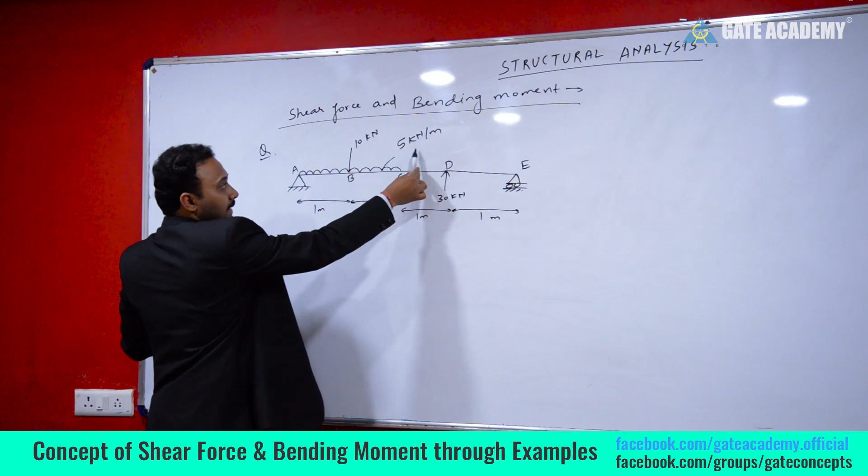तो सबसे पहले ये आप देख सकते हो यहाँ पर A से C तक एक UDL है 5 किलोन्यूटन पर मीटर का। एक पॉइंट लोड लग रहा है 10 किलोन्यूटन का B पॉइंट पे। D पॉइंट पे एक अपवर्ड लोड लग रहा है 30 किलोन्यूटन का, और सपोर्ट कंडीशंस एक हिंज्ड और एक रोलर सपोर्ट है।

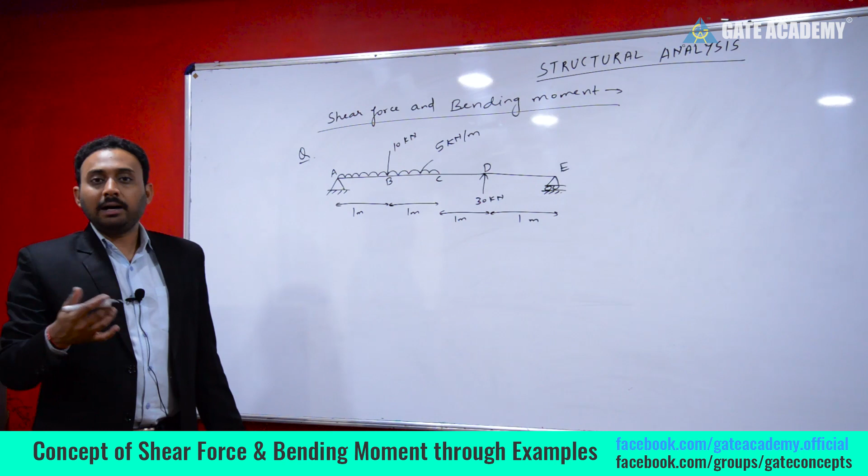तो अब इस क्वेश्चन को सॉल्व करने की कोशिश करते हैं। अब हम लोग थोड़ा जल्दी सॉल्व करेंगे। जो जैसे हम लोग सेक्शंस काटते थे वैसा हम नहीं करेंगे, हम लोग थोड़ा अपनी स्पीड बढ़ाने की कोशिश करते हैं।

तो अभी देखिए इसमें यहाँ पे दो सपोर्ट्स हैं। तो पहले मैं सपोर्ट रिएक्शंस निकालूंगा यूजिंग इक्विलिब्रियम इक्वेशंस। समेशन Fx इज इक्वल टू 0, समेशन Fy इज इक्वल टू 0 और समेशन M इज इक्वल टू 0। ये तीन इक्विलिब्रियम इक्वेशंस होती हैं जो हम सपोर्ट रिएक्शंस निकालने के लिए यूज़ करते हैं जनरली। तो अब आप देख रहे हो ये डिटर्मिनेट स्ट्रक्चर है।

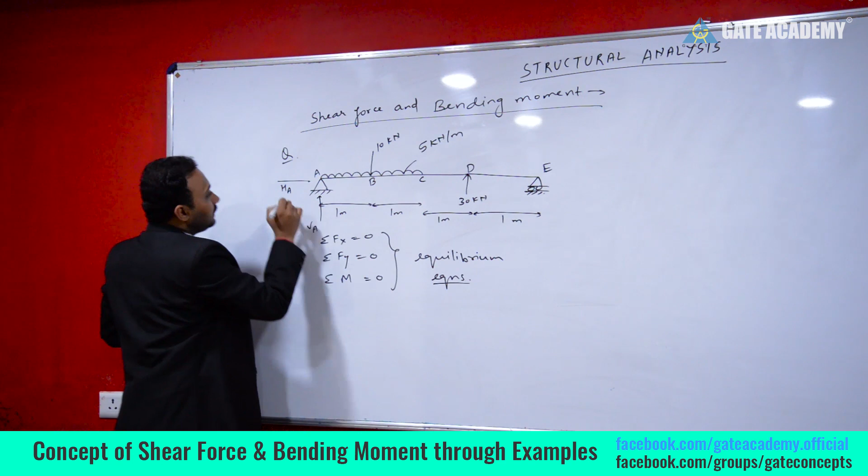यहाँ पे तीन ही अननोन रिएक्शंस होंगी, एक यहाँ पे दो, एक वर्टिकल VA मैं लिख देता हूँ, यहाँ पे HA लिख देता हूँ और यहाँ पे VE या RE कुछ भी आप मेंशन कर सकते हो। तो HA मुझे दिख रहा है मेरा 0 है बिकॉज कोई हॉरिजॉन्टल फोर्स नहीं है।

समेशन Fx इज इक्वल टू 0 टोटल स्ट्रक्चर पे हमें अप्लाई करना है। इसका यूज़ करेंगे तो यहाँ से मुझे HA 0 मिल जाएगा क्योंकि कोई फोर्स हॉरिजॉन्टल डायरेक्शन में एक्ट नहीं कर रहा है।

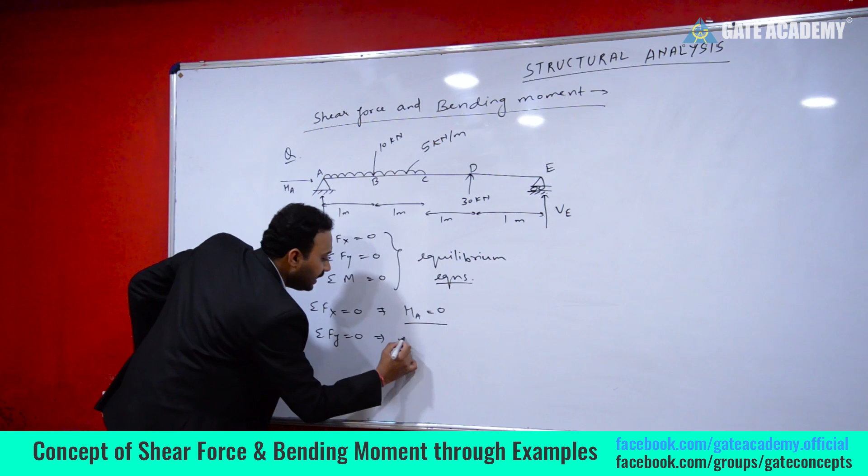इसके बाद अगर मैं समेशन Fy इज इक्वल टू 0 का यूज़ करूँ तो मुझे VA plus VE, वर्टिकल डायरेक्शन के सारे फोर्सेस को ऐड कर रहा हूँ, plus 30, this is also acting in vertical direction, and this is equal to 10 plus this load is 5 kilonewton per meter into 2.

So we will get one equation, VA plus VE is equal to 20 minus 30, that will give me VA plus VE is equal to minus 10. This is one equation that we have got.

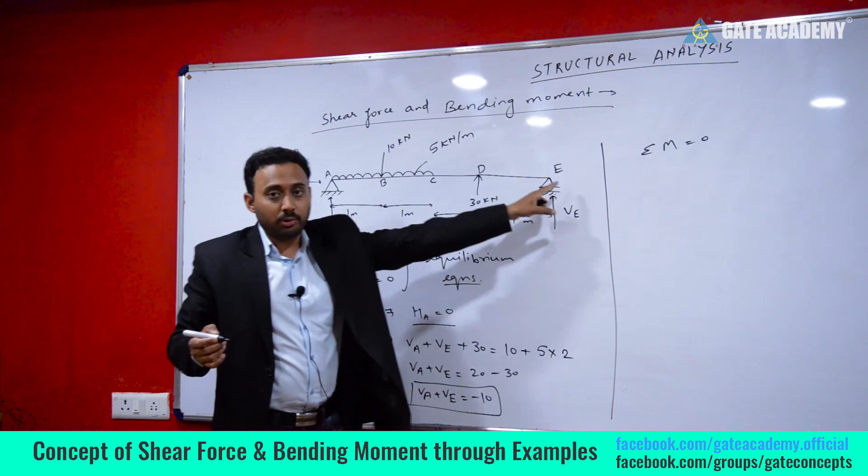Now using summation M is equal to 0. Let us take moment about A because A is also hinged and E is a roller. So we will have to take moment about any hinged point. So we will take moment about A. If we use summation MA is equal to 0, we can use any sign convention for this because this is a normal equation that we have to solve.

So let us take 10 into 1, that is in clockwise direction, then minus, then plus, we'll take this for UDL: 5 into 2 into 1 - 5 is the UDL value, 2 is the length over which it is acting, and 1 is the distance to the center of gravity. So 5 into 2, total load into 1, that is from the center of gravity. Then minus - this is in anti-clockwise direction - 30 into 3, and this is also minus VE into 4. This is equal to 0.

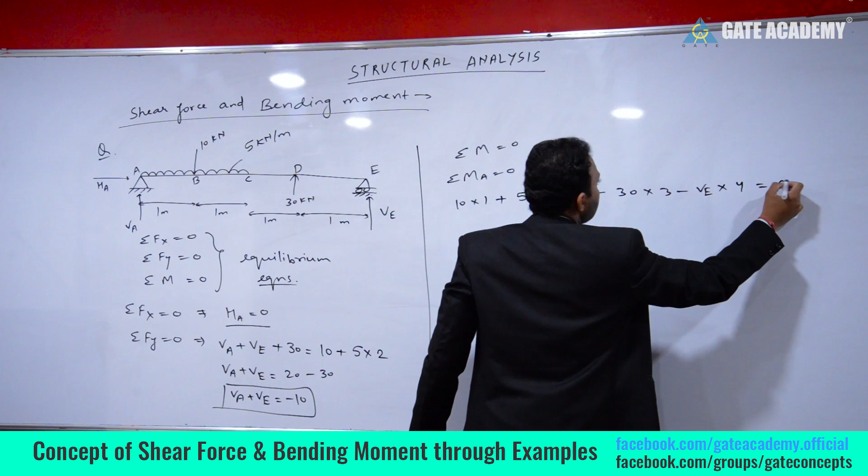So we have considered all the loads. Moment due to HA and VA will be 0. So solving this equation, we will get minus 70.

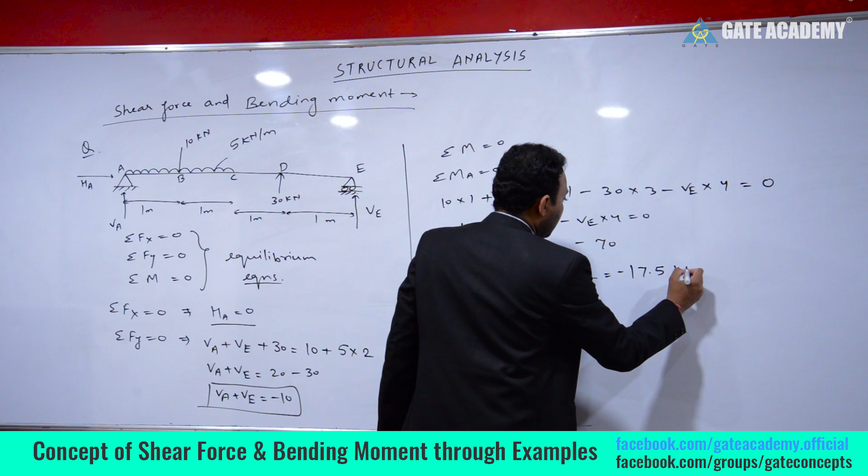VE into 4 is equal to minus 70. So VE will be minus 70 by 4, that is minus 17.5 kilonewton. So we will get minus 17.5 kilonewton as VE.

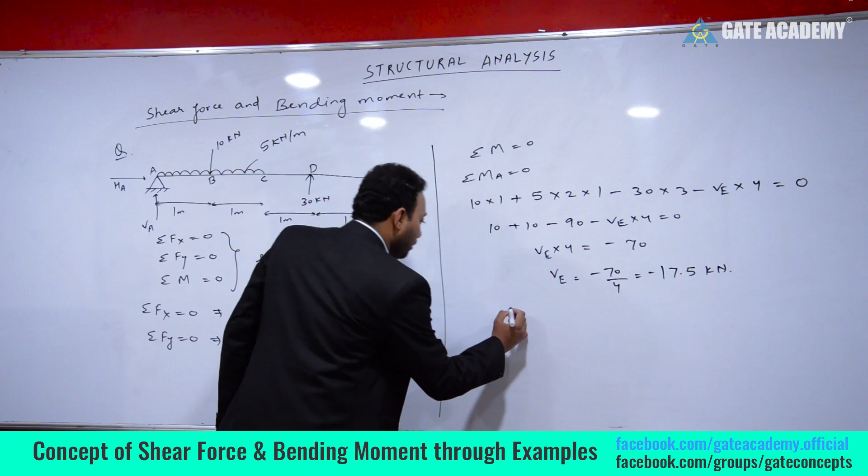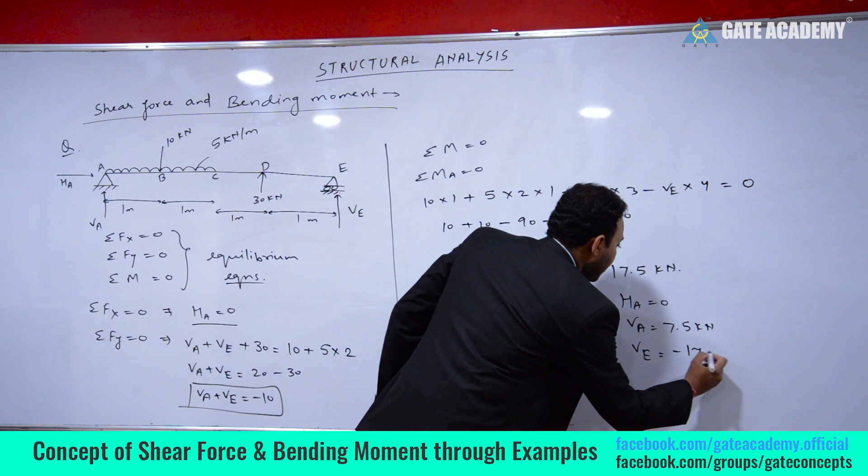So using VE in this equation, VA plus VE is equal to minus 10. So we will get VA minus 17.5 is equal to minus 10, and VA we will get 7.5 kilonewton. So we have got all the three values: HA is 0, VA is 7.5 kilonewton, and VE is minus 17.5 kilonewton. So we have got all the reactions.

Now let us solve for shear force.

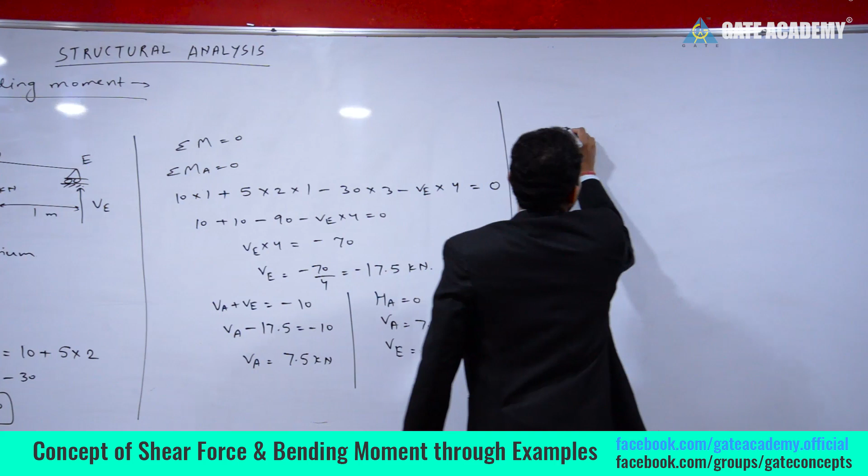Now I am drawing just the reactions. 7.5 kilonewton at point A, then the loading: 10 kilonewton is this much, 5 kilonewton per meter is this much. This is point A, B, C. At D, 30 kilonewton force is acting, and at E point, this is 1 meter, 1 meter, 1 meter and 1 meter, and at E point minus 17.5, so it is in downward direction.

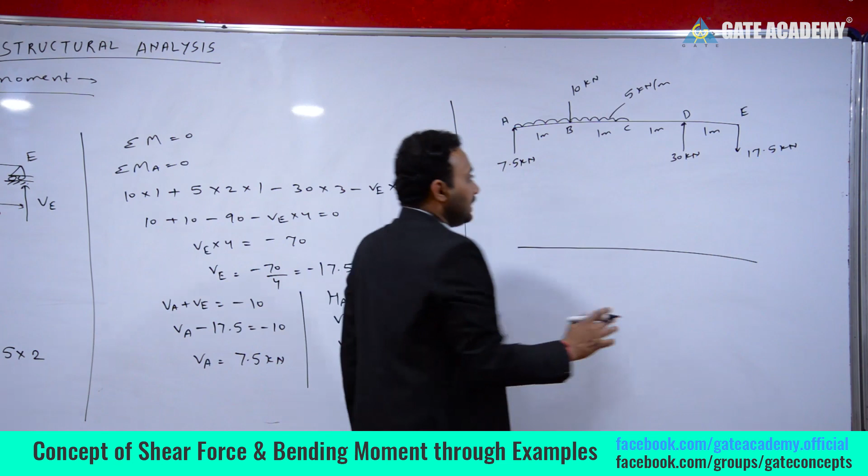17.5 kilonewton, so we have drawn all the forces including the support reactions. Let us draw shear force directly. We don't have to cut sections because this is easy, and we've already studied the process of drawing SFD. Let us start with 7.5 first, drawing a line of 7.5. It is a sudden jump because due to point load, shear force shows a sudden jump, so 7.5 kilonewton is here.

Then UDL. In case of UDL, you should remember that shear force will get a decreasing line. Like we have to calculate at B, so let us calculate at B. Shear force is 7.5 minus 5 into 1, so we are getting 2.5 kilonewton at B.

This is on the left of B. On the right of B, a sudden change of 10 kilonewton you will see. So let us draw at B: it is 2.5, so we will join this. Now a sudden jump of 10. 10 kilonewton is acting, so this will be 7.5, so this total will be 10, this total will be 10.

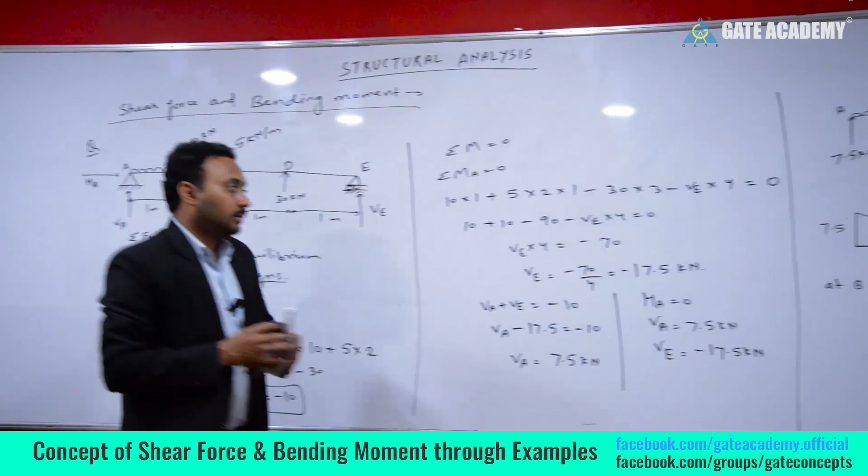Now let me write this a little bit below. So this whole is 10. Now again with the same slope it will go down, so let me calculate shear force. I am calculating it here. At B we have calculated shear force as 7.5 minus 5 into 1, this we are getting 2.5 kilonewton.

Then at C we will calculate shear force at C. So this will get 7.5 minus 5 into 2, that is the total UDL, minus 10, so we are getting minus 12.5 kilonewton. So it will go further down. At C we will get this length as 12.5 in negative direction.

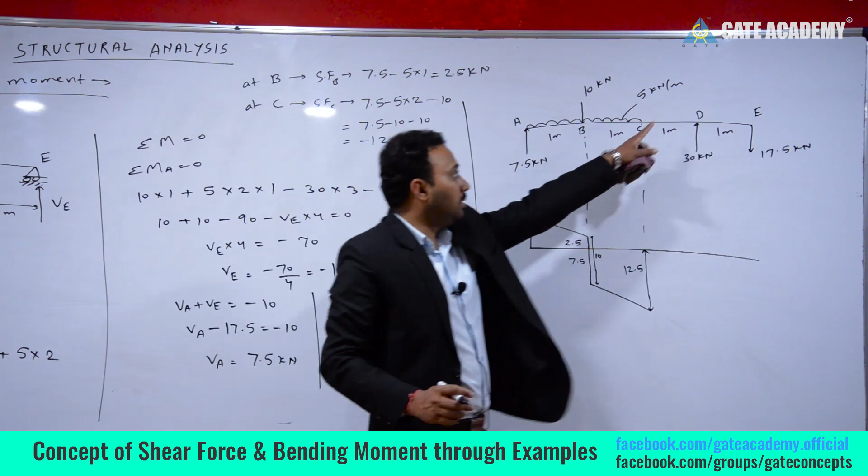Now we will get a constant value because no load is acting here in section CD, so it will stay constant at 12.5 till D. This is D point, so I am marking just here. This is B point and this is A point. So a sudden jump of 30 kilonewton will act, and it will show like this.

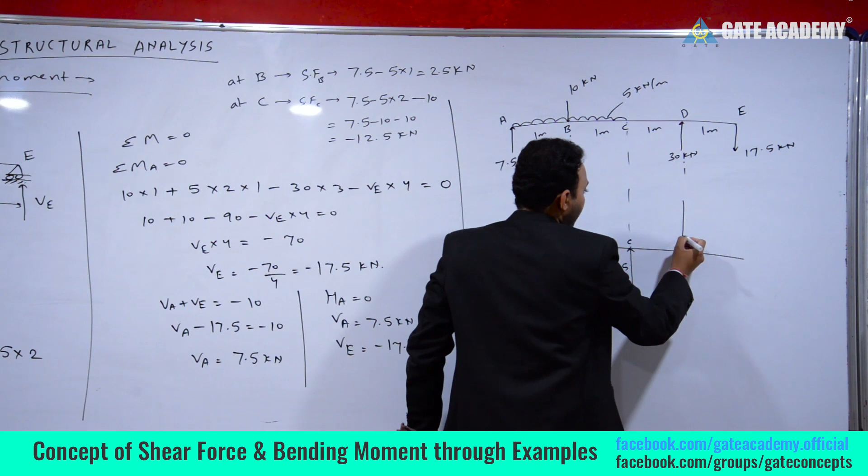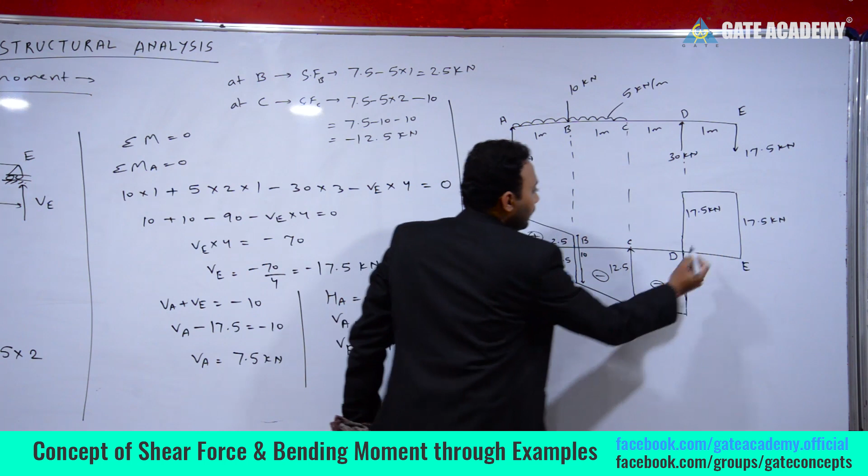This is D point. Now this was 12.5. If it will go up 30, because 30 is acting in upward direction, we will get 17.5 kilonewton, and this will be constant because no load is acting here, and finally this 17.5 will come down to point E. You must have understood the SFD. We'll mention the signs: this is positive, negative, this is also negative, and this is positive. So we have drawn SFD. Now we'll proceed to BMD. Let us see how BMD can be drawn.

So this is our loading pattern. Now let us draw BMD. We might have to calculate certain values at some points. Now it is a hinge joint, we know this is a hinge joint, point A. So bending moment at this point will be 0, so we'll start with a 0.

Now we can see this is a UDL. You know we have already discussed that if shear force shows a sloping line, then the bending moment will be 1 degree higher, that is it will be a curve. So let us draw. We don't have to calculate all the things, just we have to calculate bending moment at some points and we will draw it roughly.

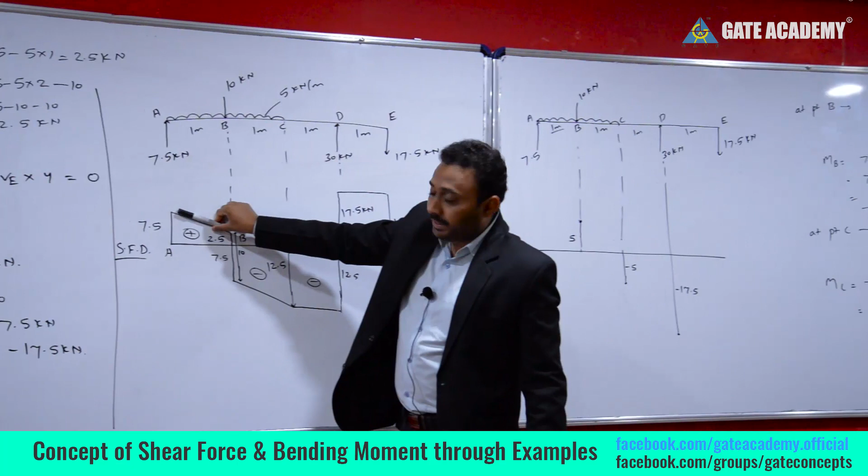See, this is a slope, negative slope, negative slope. So negative slope means bending moment will have curvature downwards. We have already understood this. So let us draw downward curvature, see, we will draw like this. This will all be a curve.

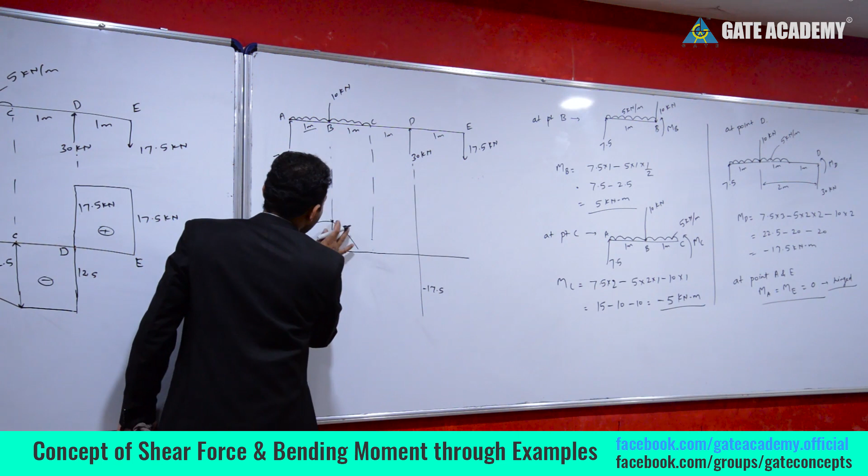This all will be a curve. Let us draw it smoothly. This all will be a curve. Let it be like this.

So why curve? Because there is a UDL acting here. Now see, this is a straight line. So it will be straight here only. So in this portion, let me clarify it a bit more. See, till this portion it will be a curve.

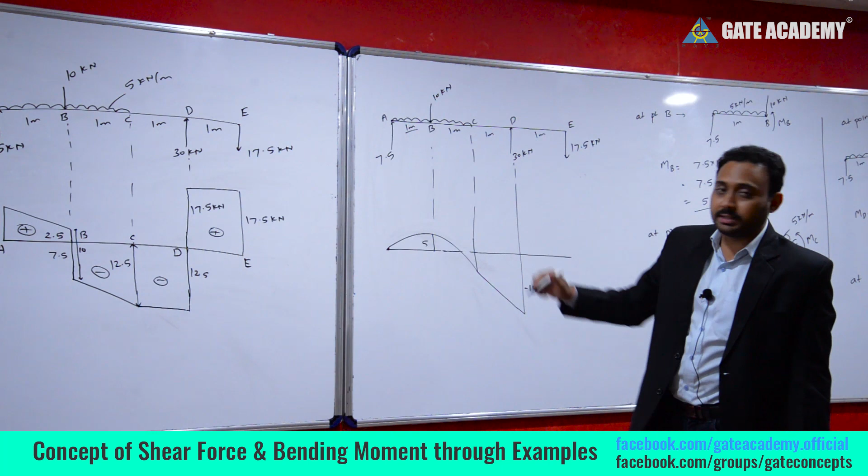You are getting it? See, this is 5, this is a curve, and beyond this point it will be a straight line because the shear force diagram is showing constant value. So it will be a straight line from here to here, and then from here to here also the shear force diagram is a straight line. So we will just draw a straight line and finish it off at E, that is at 0. So this is minus 5, this is plus 5, this is point B, this is point C, this is point D, this is point A, and we have drawn a BMD.

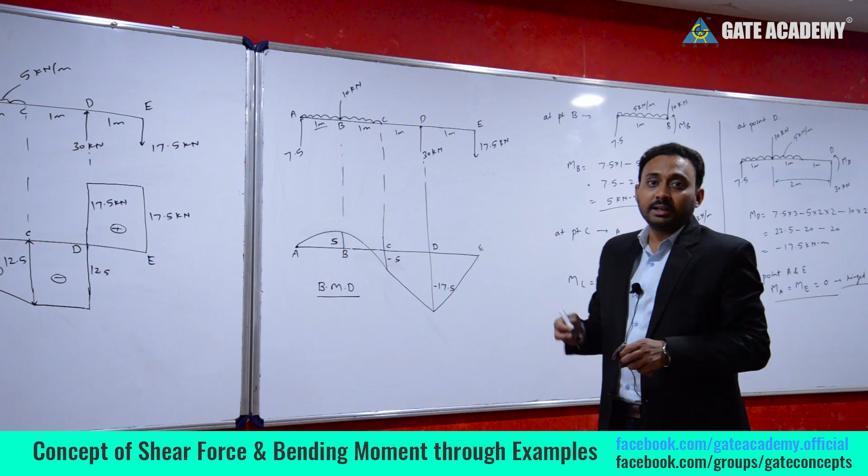So you have got it, see, we have taken help from the SFD, we have taken help from some points, and we have directly drawn it. You can use this practice to continuously solve these BMDs and SFDs, and you will get highly proficient in this once you keep on practicing. See, I have easily solved this.

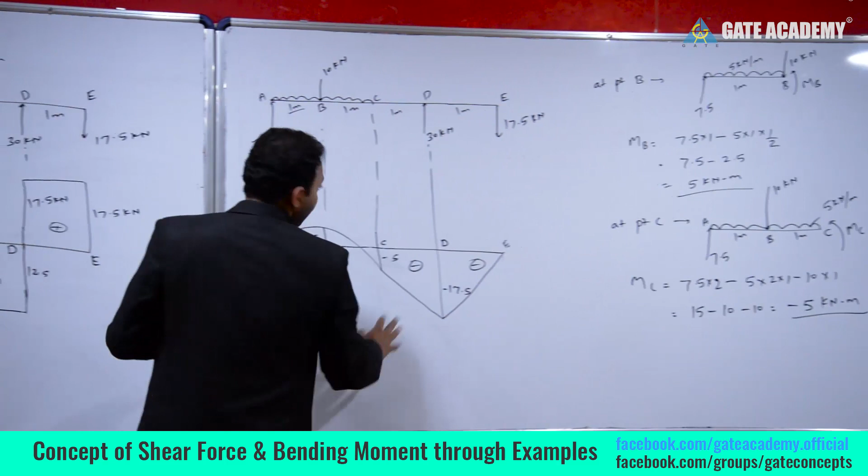Now as we have drawn the BMD, from this BMD diagram we can draw the deflection curve as well. So we can see this BMD is positive up to this point and negative beyond this. So this is called the point of inflection, as we have already discussed.

Now to find out where this point lies, we have to find where this bending moment is getting zero. Let us write equations. If we see, this point of inflection is between B and C.

Let us cut any section XX from here and write the bending moment equation. This is 7.5, up to point X, and this 10 kilonewton is acting 1 meter from here. Let us calculate Mx.

If we write the equation, Mx is equal to 7.5 into X minus 5 into X into X by 2 minus 10 into X minus 1. X is this full length minus 1, and if we equate it to zero, then we will get one value of X.

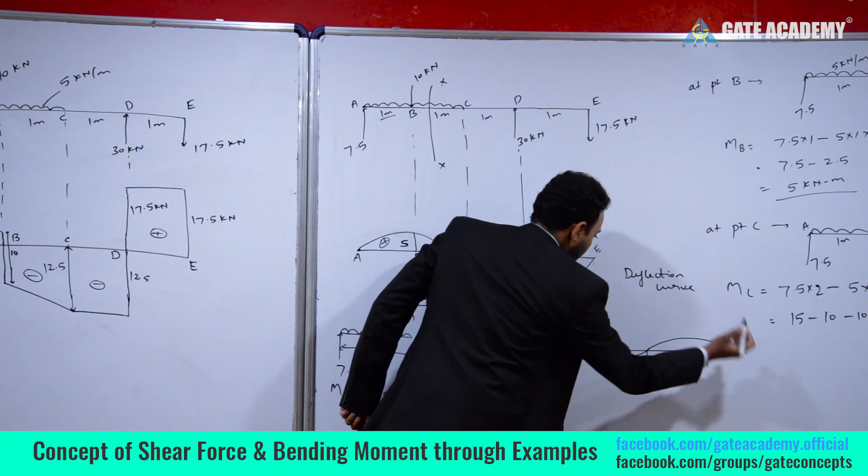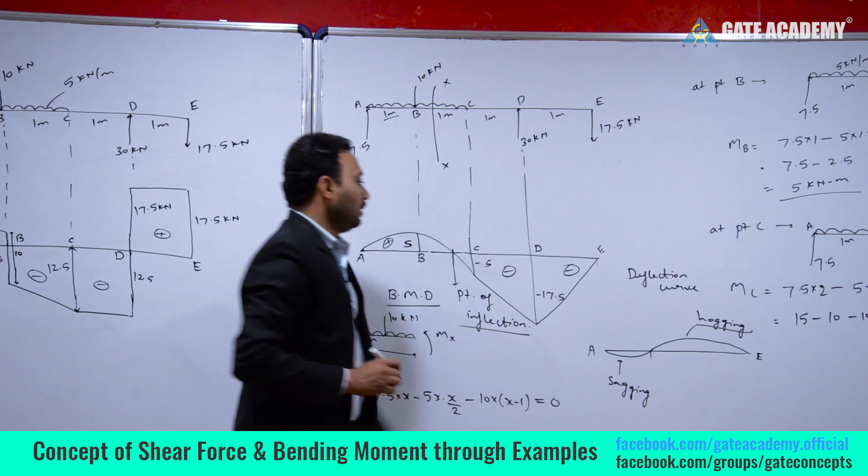The deflection curve can be drawn like this. This portion will be sagging, and this portion will be hogging, because totally it is negative. So you are getting this point, how we have drawn the hogging and the sagging for the deflection curve, and how we have calculated the point of inflection.

With this example you must be clear about SFD and BMD. Now let us take few more examples and solve them as soon as possible. So now you have got much idea about it. Now let us solve some more problems.

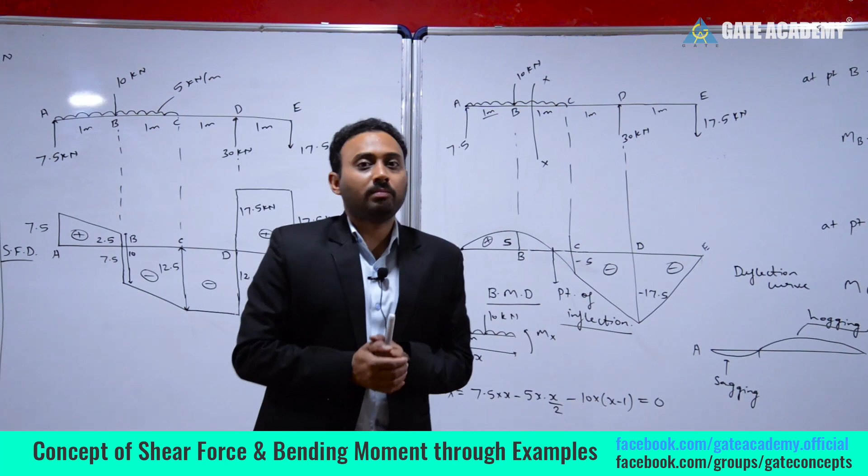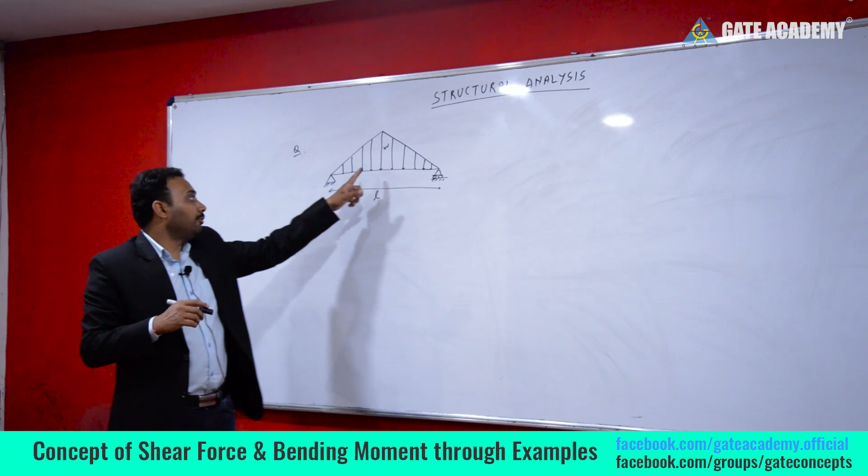Now let us solve another problem. This is not a uniformly distributed load, this is a uniformly varying load. For half of the section the load is increasing, and for the rest of the half of the section the load is decreasing. So you can see this problem. Now let us solve it.

This point is A, this point is B, and this point is C. Now see, the reactions at A and C will be equal because the load is symmetrical. So we can directly write RA is equal to RC is equal to total load divided by 2.

Now what is the total load? If we talk about it, this is a triangular loading, so half into base into height, this is the area. So this is the total load, divided by 2.

Now this W that you are seeing is per unit length. So if we multiply it by L, then it will become a total loading unit. So we can write RA is equal to RC is equal to WL by 4. So we have got the two reactions at these 2 points, RA and RC.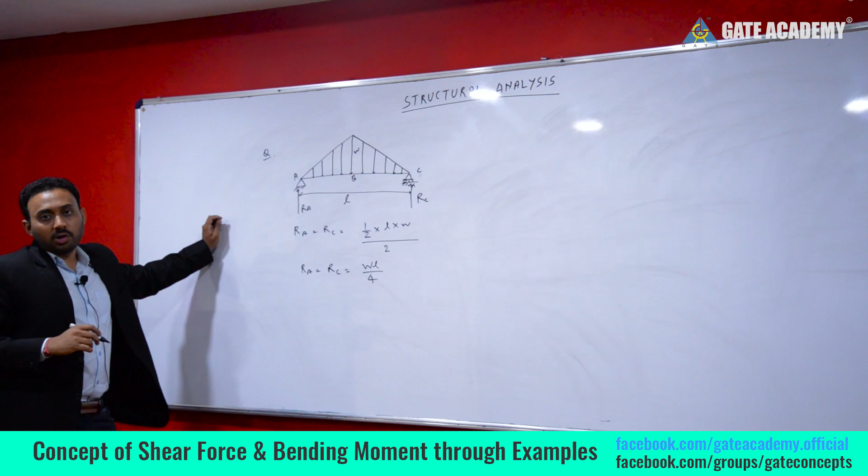Now let us solve for shear force. In this we will cut one section because this is a different type of problem, so you will get a broader idea how we are getting the sections and how we are getting the equation for shear force. Let us cut one section from here, anywhere in between XX.

So I am drawing just this section. Suppose this is Wx at a distance x, this is Ra, and this is the loading that is acting. Now see, what is the value of this Wx? Let us draw it up in a better way.

See, this is Wx, okay. Now if we see this triangle, suppose AOB, and this point is M and this is M dash. So if we see triangle AMM dash and triangle AOB, what we will see is these are similar triangles. Now with the property of similar triangles, we can write this distance is AB upon AM, this is equal to OB upon MM dash. You can easily write this.

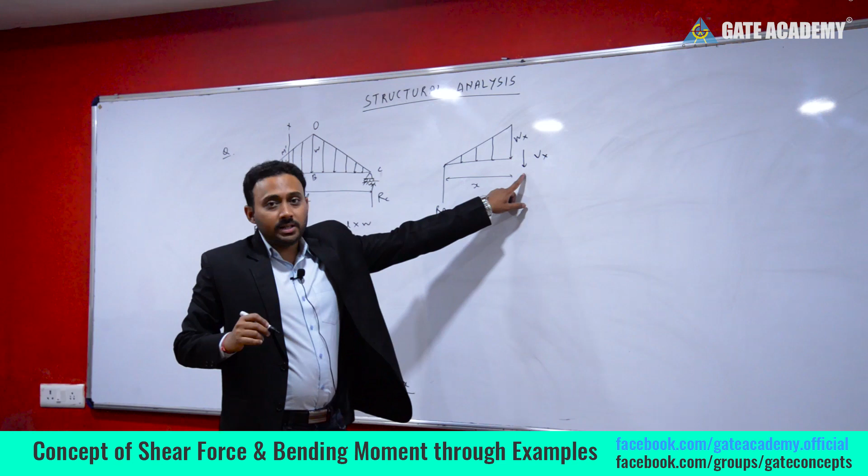Now as we are solving for shear force, we solve it like this. We assume this direction - I have already told you, because left hand going up means positive. To balance this will act downwards. So this will be the direction of positive shear force. So to balance this Vx, we can write Ra minus

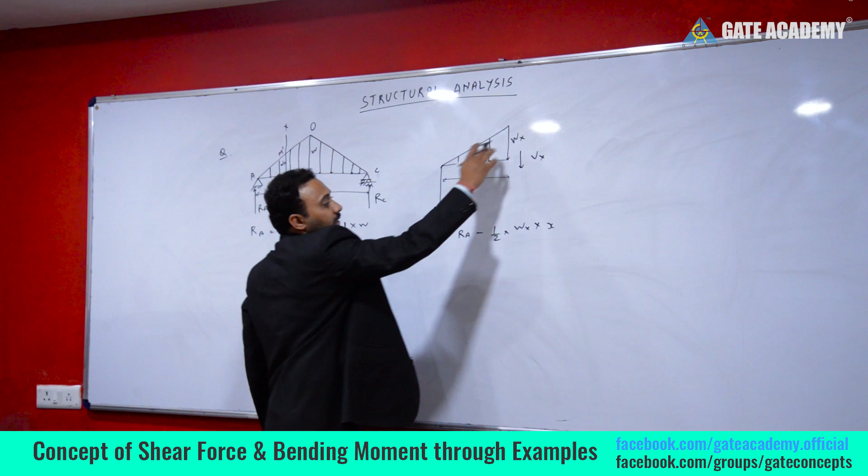this total load, because this is acting downward. So this is half Wx into x. The area of this will give you the total load. Now let us solve for this. This will give you Ra minus Wx value, we know 2 into W into x upon L, and this will be one more x. So Ra we have already calculated, WL by 4, minus this 2 will get cancelled, Wx square upon L. So we have got this Vx equation.

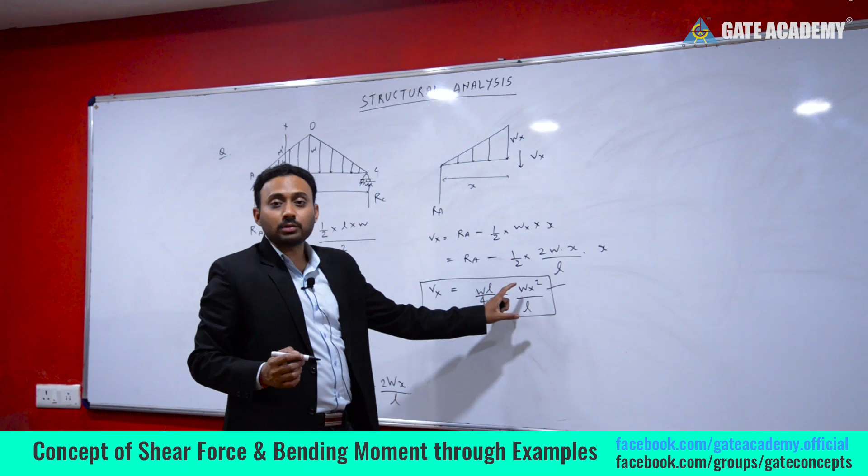Now the point that we have to notice is that this is a quadratic equation with minus as coefficient. So it will be a parabola with curvature downwards. So this we have cut section from here.

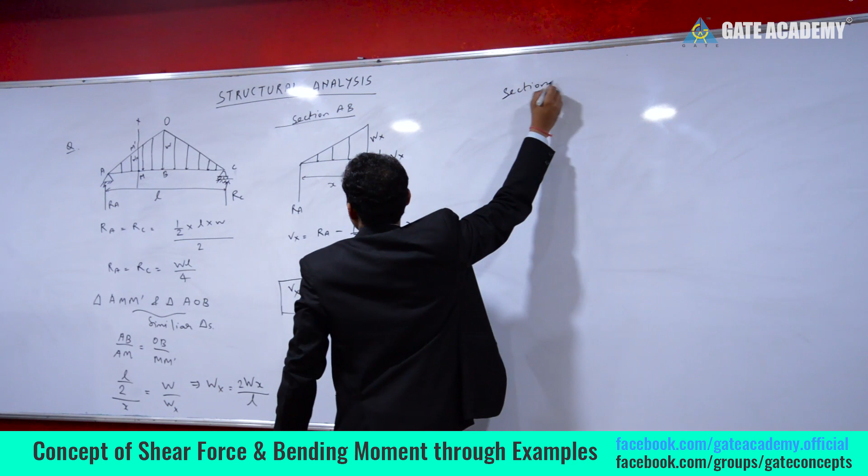So let us take it as section AB. This is in section AB, right? Now let us take another section here - I am writing it as section BC. Now let us take another section BC. Now you will get one idea from here. Now suppose this is the section that we have cut, suppose this is the section x dash that we have cut. Now from here you will get one idea.

See, this is Ra, this is W, and this is Wx, suppose, and Vx will be acting like this - this is the positive direction. Now let us draw another part. This is RB, this is Wx, and this is the other part, this is the loading, okay.

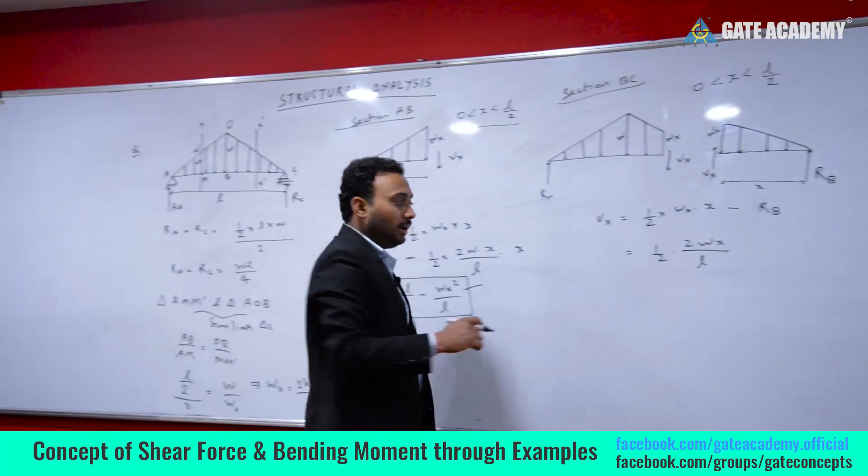Now again let us write the full equation, half into 2 into Wx divided by L - Wx we have used from here, this will be the same, so we don't have to calculate once more. Now this minus WL by 4. Now see, we have got another equation with coefficient as positive. This is the same Vx, this Vx is same as this Vx only. So we have got the same equation. Now see, here the coefficient is positive and here the coefficient is negative.

Now let us calculate at B - from any equation you can calculate shear force at B. So x will be equal to L by 2, here if we are calculating. Here also x will be L by 2 because we are taking it from here, this is the reference point. So keeping x is equal to L by 2, shear force at point B - here also if you put L by 2, this will come out to be WL by 4, and this will become 0. So shear force at B is coming 0. Now let us draw the shear force diagram.

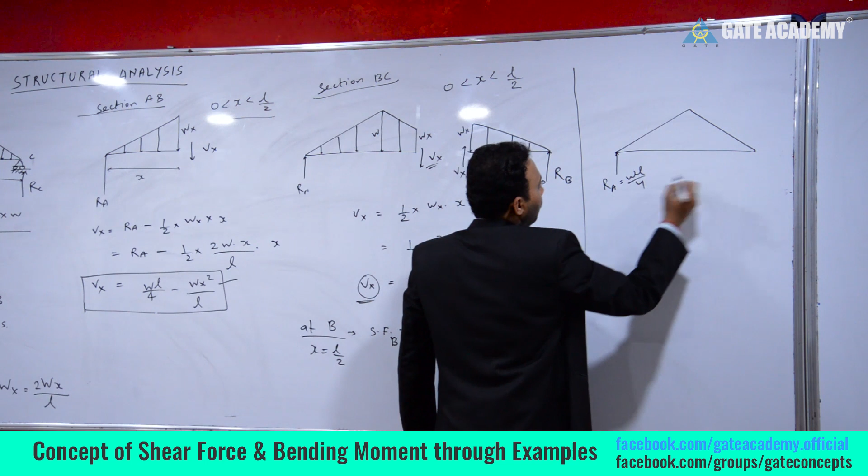See, this is the loading, this is Ra, that is WL by 4, this is Rb, that is WL by 4. You have already calculated all these things.

Now let us draw the SFD. A sudden increase of WL by 4 can be seen here because a point load is acting, it is a kind of point load.

Now this is the equation with negative coefficient for the section AB. So for section AB, we have negative coefficient of x square, so a parabolic curve can be drawn with curvature downward, and at B it is 0. So we can draw it like this as positive. This is point A, this is point B.

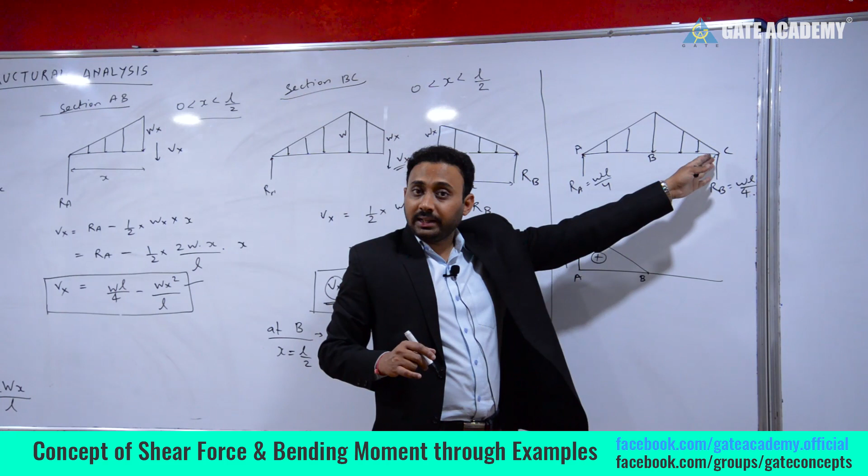Now for the rest of the section, that is BC, we are getting this equation with positive coefficient. So if it is positive, the curvature will be upward, but the value is negative because the loads are continuously increasing. Here this load has balanced this load, but here we have a decreasing downward load, so as the downward load increases, it will give shear force negative.

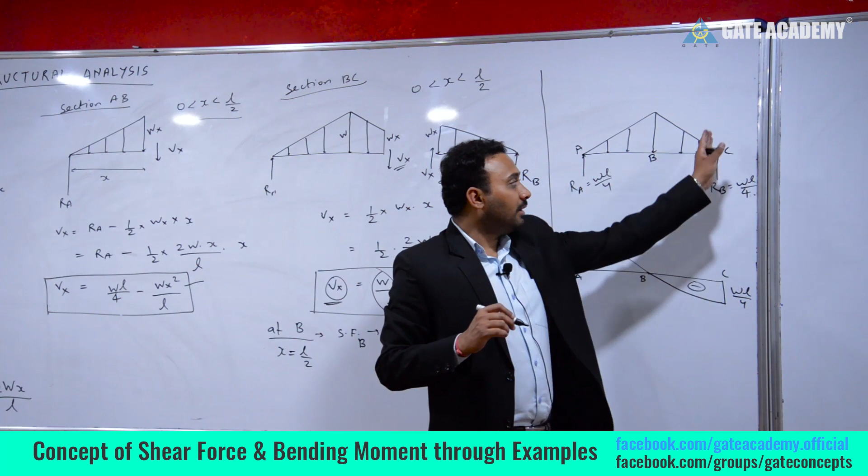So we are getting the idea from here. Let us draw a negative shear force diagram with curvature upward, and suddenly there will be upward force and it will come out to be 0 at point C. This will be symmetrical, like this.

So this is how we have drawn the SFD. Now you can see how we can correlate it with the loading pattern. If you have any doubt regarding the pattern of drawing SFD, you can correlate it with the loading pattern. This will give you confidence and surety that you have drawn it correctly.

Now see this shear force diagram, this is a loading curve with negative curvature. Sorry, this is the SFD. Now see the loading curve, this is increasing in the section AB, so W into X is increasing with X. See this 2 into Wx by L, you can see it here. The load is increasing in the section AB.

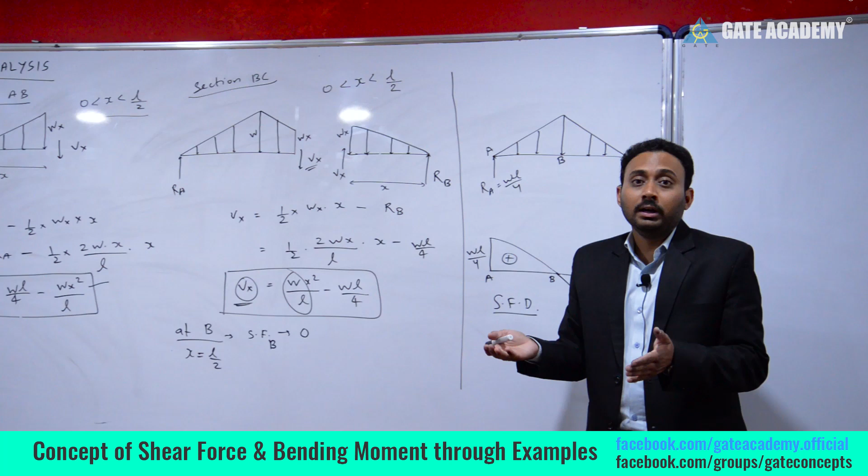So if it is increasing, we know that the differentiation of the shear force diagram with respect to X is minus of the loading curve. We have already discussed this. So the loading curve is increasing with respect to X, so minus Wx, and if we integrate it, it will give negative coefficient of x square. As we are getting the negative coefficient, it is with curvature downwards.

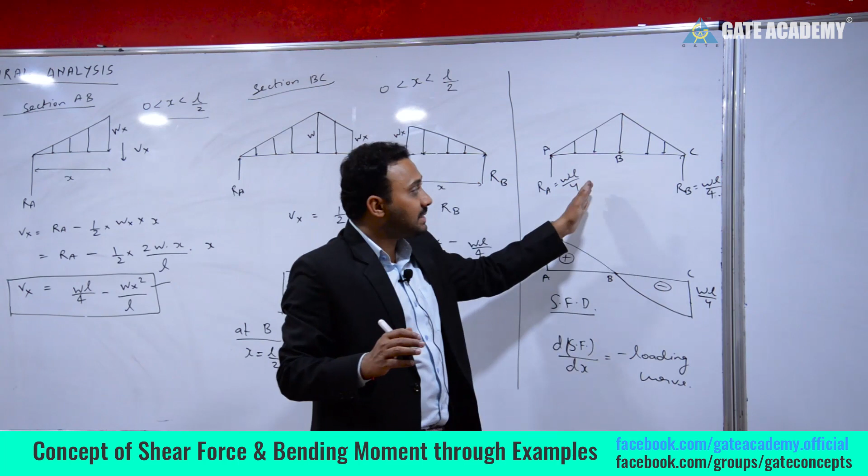Now in the second half, you know that the load is decreasing, so it is minus Wx. In actuality if we consider from this side, this is increasing, but from the convention of the left side, it is decreasing. Since it is decreasing, minus minus will become plus, and this will give a positive coefficient on integrating, so we are getting an upward curve. So you can be sure from here how the loading curve is related to shear force.

So I think this SFD is clear. Now let us move on to the BMD part. It is also very easy. For BMD, let us take the first section in AB.

So this is the loading, and this is Wx, this is X, this is RA, and this is Mx. Now for this first section AB, let us write the equation Mx. This will be equal to, this is clockwise moment so we will take it as positive, RA into X, minus, now this loading is in downward direction.

Now let us see how we are calculating this. This is the total load. Now for the centroid, you know that it lies at 1/3 from here and 2/3 from here. So the centroid will lie somewhere, suppose here, this is the centroid. So this will be x/3 and this will be 2x/3. You are getting?

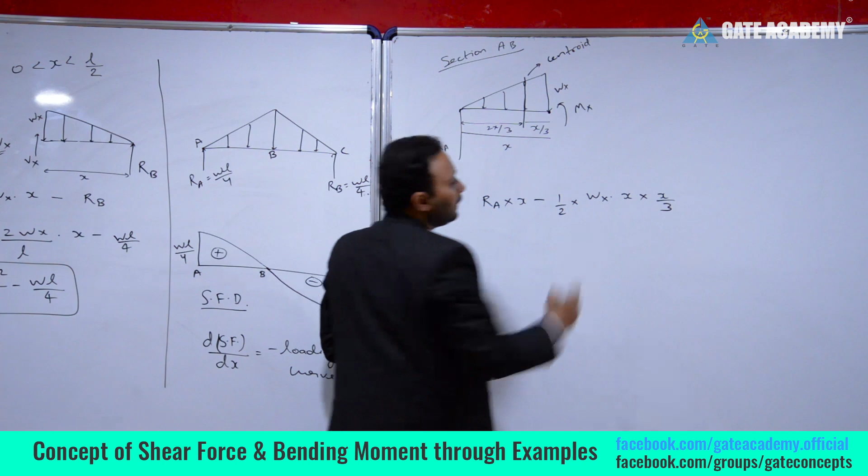So this will be x/3 and this will be 2x/3. We are calculating it from here, so we will write into x/3. This is the total load into distance from the centroid, so this will become moment. Moment will be RA into X minus this equation. We can write RA as WL/4 into X minus half into Wx, which we have already calculated as 2Wx/L into X/3. So we have got it here, W into X cube upon 3L.

We have got the equation of Mx, a cubic equation with negative coefficient. Now see, this will help us out. How will this help us out? Let us see.

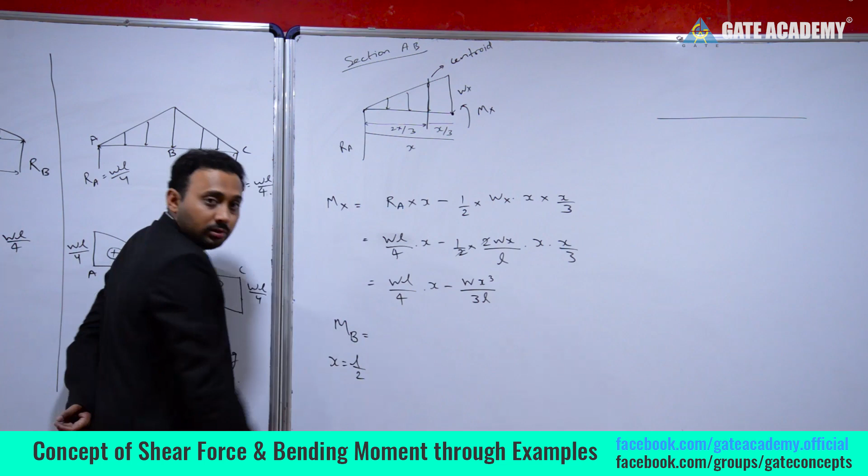Now if we calculate moment at B, what will be this? X will be equal to L/2. This is very clear. For section AB, X is between L/2 to 0. Now moment at B is equal to WL/4 into L/2 minus W upon 3L into L/2 whole cube. If you solve this, MB will come out to be WL square by 12.

So now let us draw the BMD. This is W. At point A it is hinged, so we will start from 0. The coefficient is negative, but at x equal to 0 the value is positive, and as it increases, it will remain positive. We will get a maxima or minima at point B because shear force becomes 0 and changes sign at point B. So from here we will draw like this. We have drawn half of the section, WL square by 12. This is point A, this is point B.

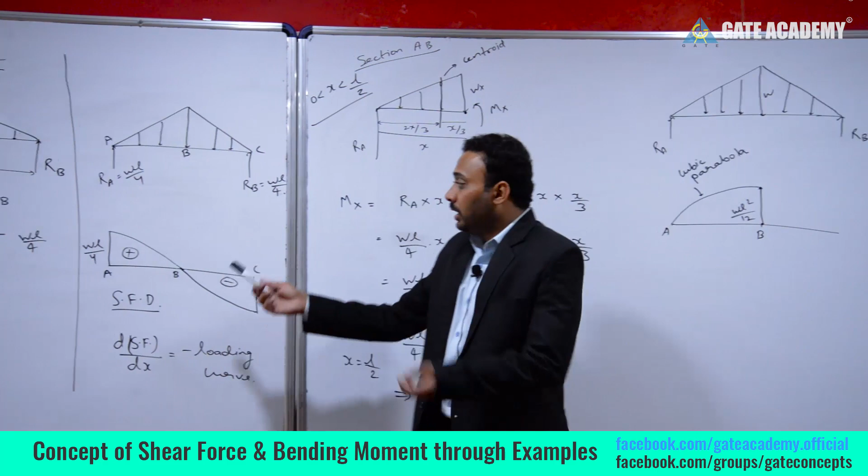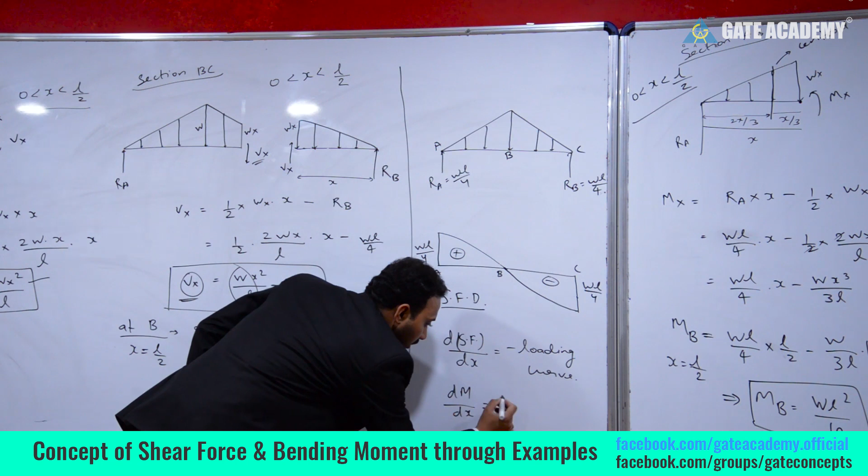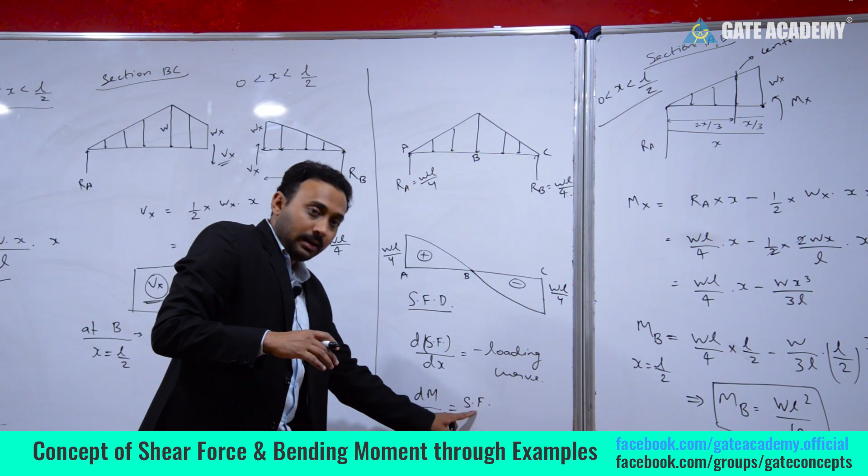Now for the rest of the section, how do we draw it? See, the value of shear force gives us the bending moment. You know that dM/dx is equal to shear force, so the value of shear force gives you the slope of the bending moment diagram. The values are continuously decreasing up to point B, so the slope has to be continuously decreasing. Are you getting it? If the value of shear force is decreasing, the slope is also decreasing.

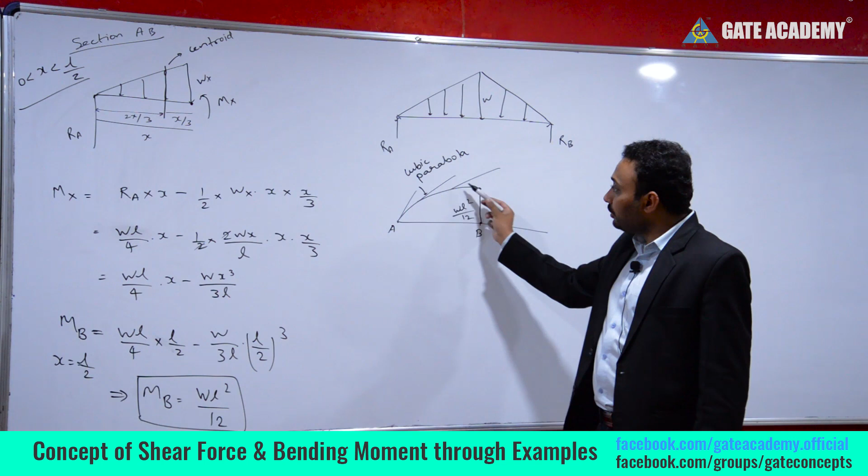Now let us come to here. The slope is like this, here like this, here like this - the slope is continuously decreasing. This is clear from the shear force diagram, which I am drawing here also, like this. So the value is decreasing, the slope is also decreasing.

Now see, the value is increasing in the negative direction while increasing in magnitude, so the slope will increase in the negative direction. See how the slope is increasing in the negative direction - the slope is negative, negative, negative, and it is increasing. We have proved how this is related to this, so you can draw this as positive.

And it has come to 0 at point C. This is point A, B, C, and it has come to 0 at point C. The slopes in this portion are decreasing - positive slopes are decreasing because shear force value is decreasing, and these negative slopes are increasing. I hope you have got the relation between shear force and bending moment diagram.

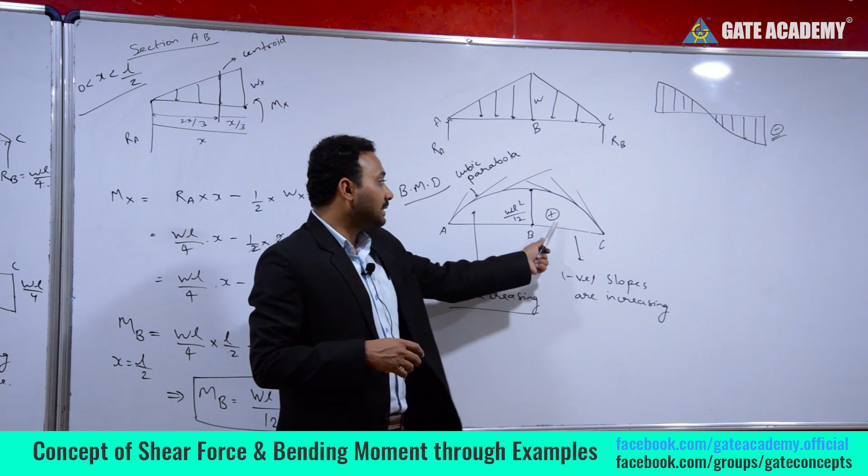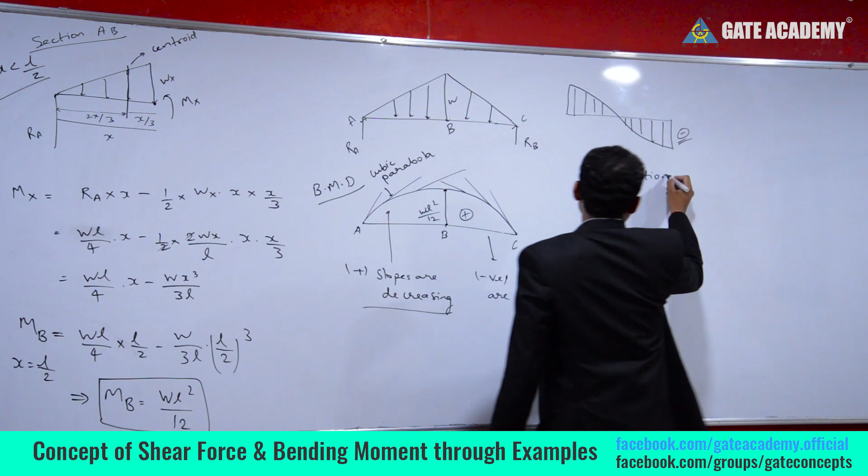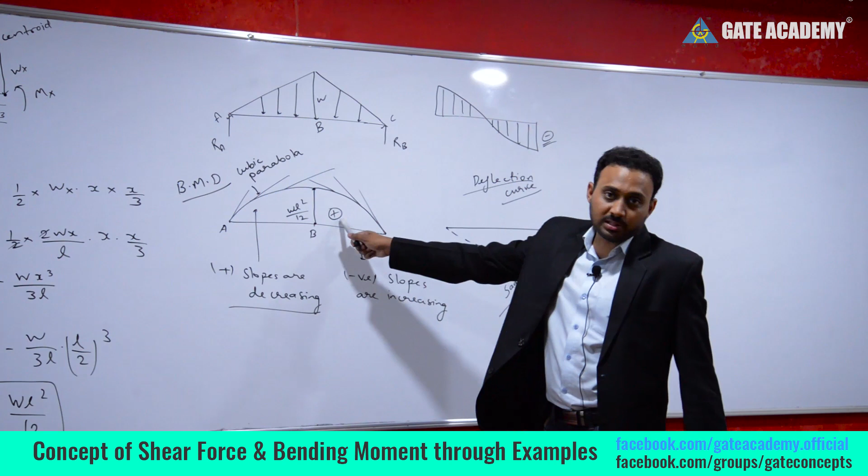Now if we are to draw the deflection curve, then obviously this is positive and this whole section will be sagging. So if we draw the deflection curve - see, this is a beam and I have drawn a sagging beam. We have drawn a sagging beam because the bending moment is positive, so this beam will be a sagging beam, and this is the deflection curve.

So I hope this example is clear to you, and now we will move on to the detailed structural analysis part slowly. This will give you a brief idea of how we are correlating the BMD, SFD, deflection curve and the loading curve.